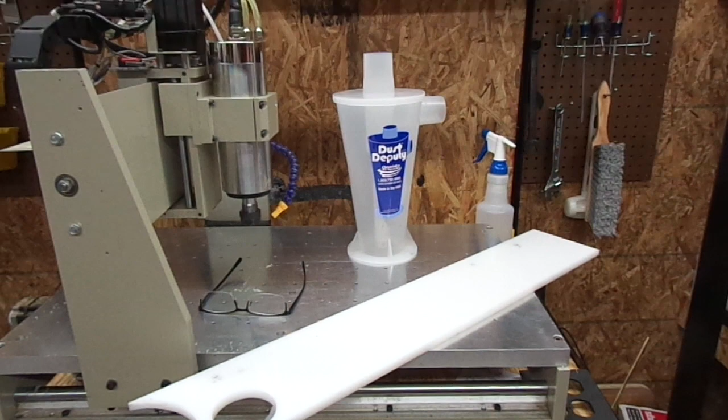So today's project is going to be the Dust Deputy installation. And I have not fired this machine up in a couple of months. I've been in the middle of a house renovation. So today we're actually going to make some chips.

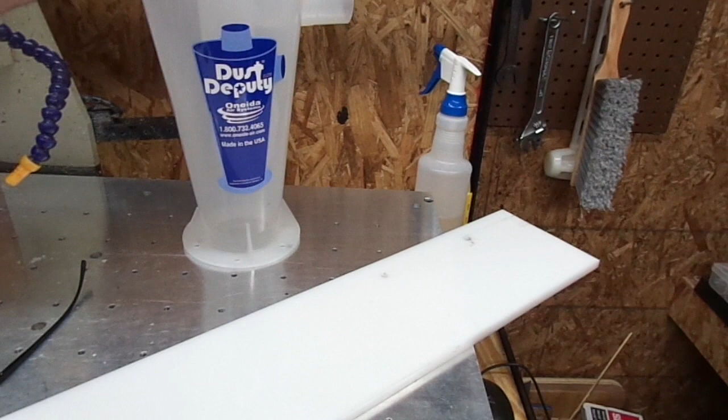And I've got some scrap UHMW, and this will support the bottom side of the bucket. And I'm going to attempt to cut some pieces that are going to go in the top here to support the top and bottom.

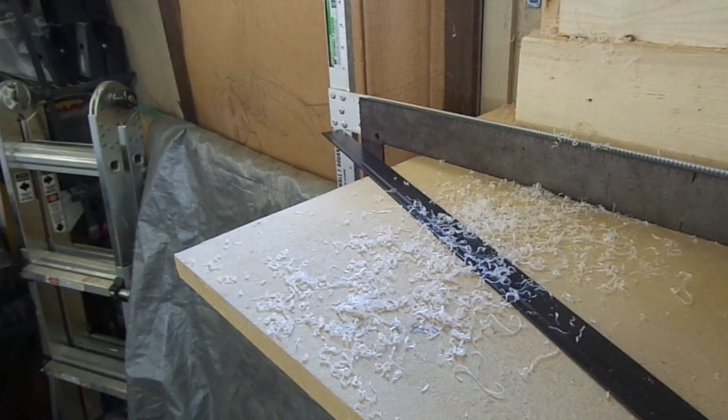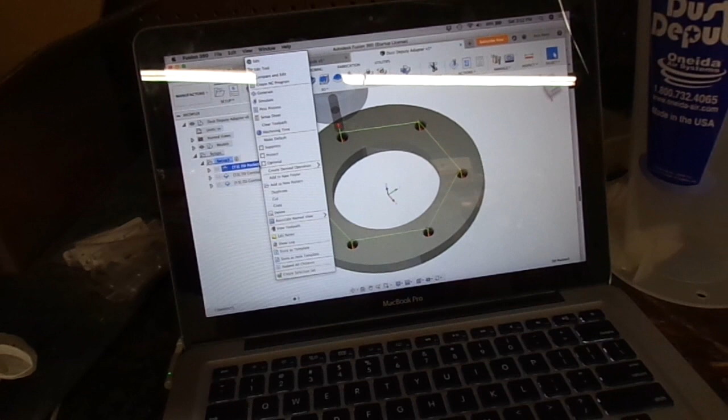Okay, so let's talk about the Fusion for a second. So this is the bottom side, and I've got the holes here, should be 5/16. So I'm going to start out with the little pocketing, and we'll look at the setup here. 15,000 RPM, 80 inches a minute cutting.

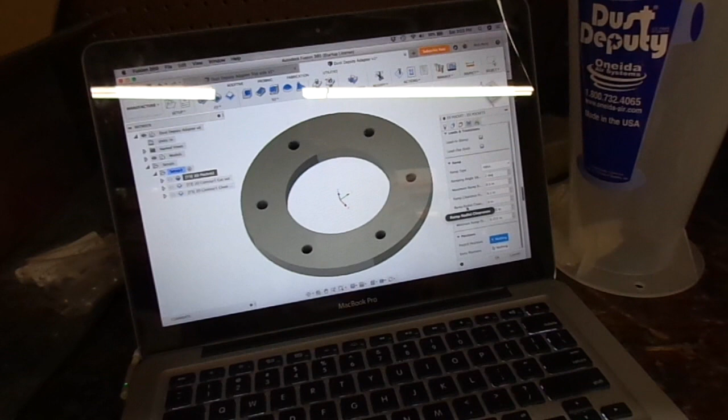So there's my geometry. On the tabs, I'm going to do multiple depths at 125 at a time and no stock to leave, with the ramping helix to go in. That's the beginning. And then we have this contour cut, which will cut out the inside. Same thing, it's going to drop down, so 80 inches a minute, 15,000 RPM.

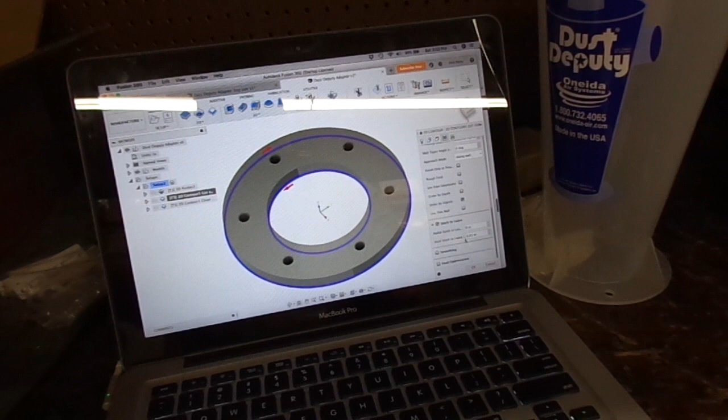We're going to do 125 thou at a time. We're going to leave 10 thou for cleanup. And that, by the way, will have a ramp at 2 degrees, just the stock settings. Okay, then the last will be a cleanup pass. Same thing, 15,000, 80 inches a minute.

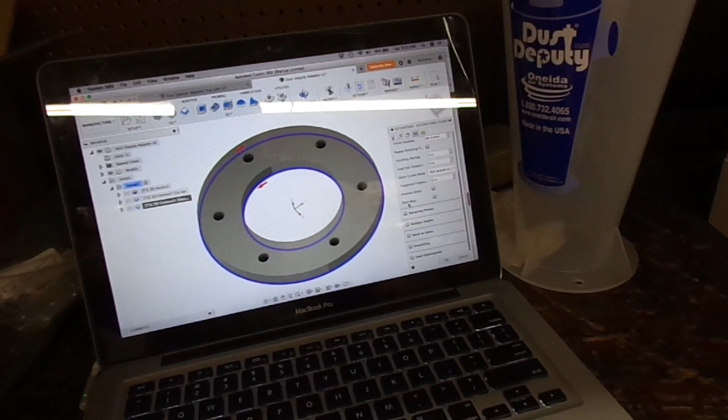No multiple depths, it's going to bury full depth and go around. No stock to leave, so it'll cut the other 10 thou off for a cleanup pass. I left the ramp in. Sometimes if you don't, when it comes in, it'll leave a line right here. So I want to kind of come in at an angle and let it cut.

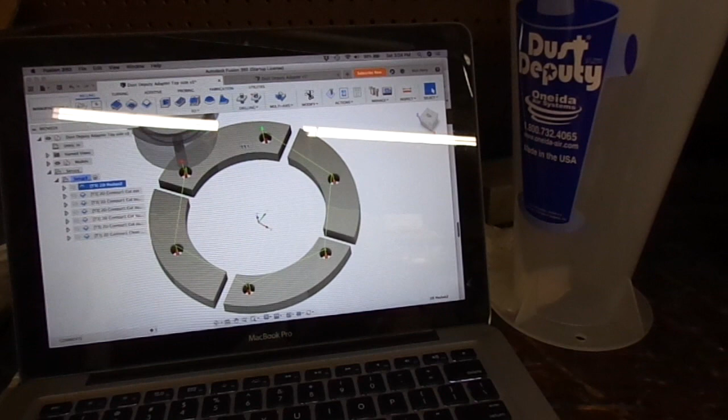This is the top piece. Same thing, going to come in and pocket. But I wanted to show you a few things. So I've got a few different cutout files. And you can see how I've got this file only cuts this, then this one, this one, this one.

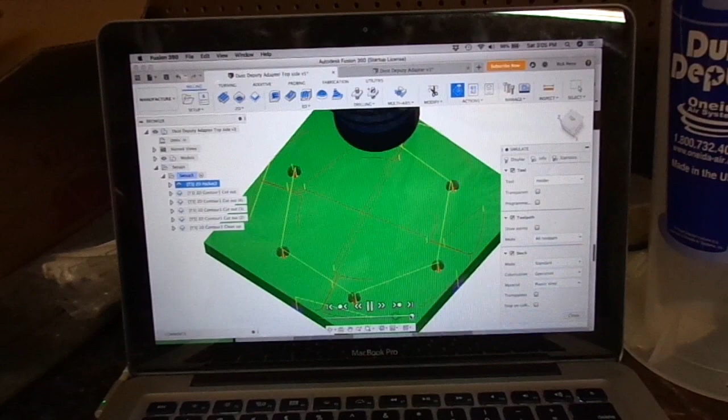With this, we can come in, it's going to cut the 4, 5, 6, cut that one out, this one completely out, this one out, then this one out. Then it's going to go around and it's going to do the cleanup pass on all of them.

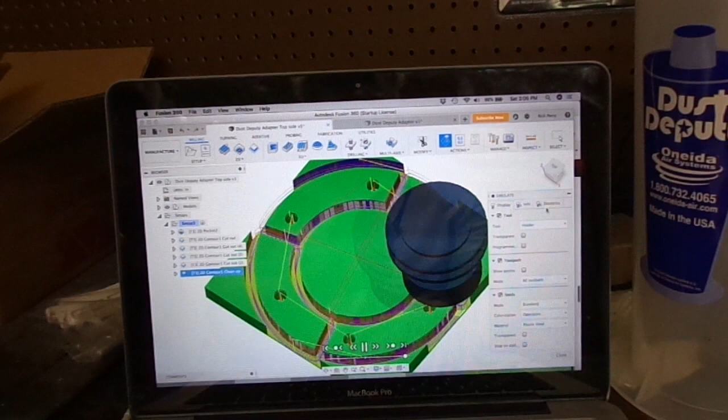So the total run time on this one is 5 minutes. I think the other one was 3.5 minutes. Yeah, 3 minutes 23 seconds. So I'm going to try to run these back to back so you can get a 2 for 1. So let's go set the machine up.

I'm gonna take you off the tripod for a second. You got to see how this thing's shaking, it's shaking the whole thing. You will not get a stock 6040 with enough torque to do that.

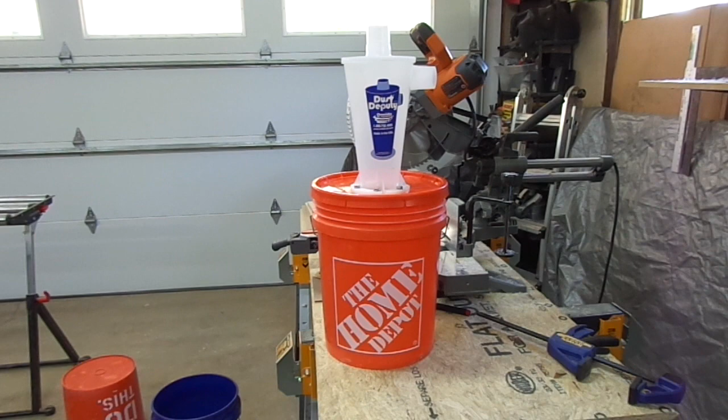There you go. One completed job. I'm not going to put it to use because you can see thousands of videos on YouTube on how they work. And they do work or they wouldn't sell them. So this is it for the video. The video is to basically talk about the CAD files on making it work, and I will have the CAD files available on my website for this Dust Deputy.